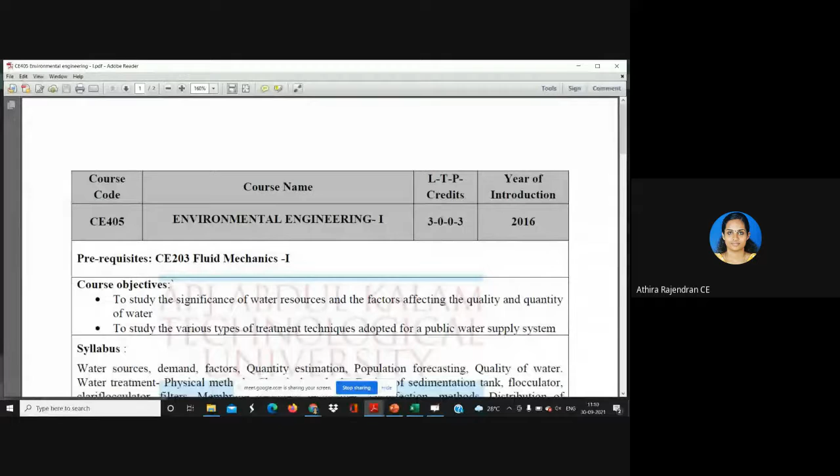Then we will come across demand. So how the community can demand water, that is, if you are setting up a water supply plant, this community needs this much water. So how will we supply water to them? So we need a calculation.

So we need a calculation for how much water is required for drinking, bathing, washing, everything, as well as for gardening purposes. So for everything we need to have a calculation. Based upon that, we will be supplying water to a community.

Okay. Then if we are setting up a water supply plant at the current date, we'll be planning it for a future date, like it will have a life of around 20 to 30 years. So what is going to happen in those 20 to 30 years? The population is going to increase. So we have to estimate the population at a period of after 30 years, and then we have to design these things for that population.

Okay, then we have arrived at the water quantity, how much water we have to calculate. So after that we have to think of the water treatment system. So what all treatment do we need to give? Physical methods, chemical methods, other methods are there. So some methods we have to design. Some design elements are also coming in this one, so for the treatment, some design units are there.

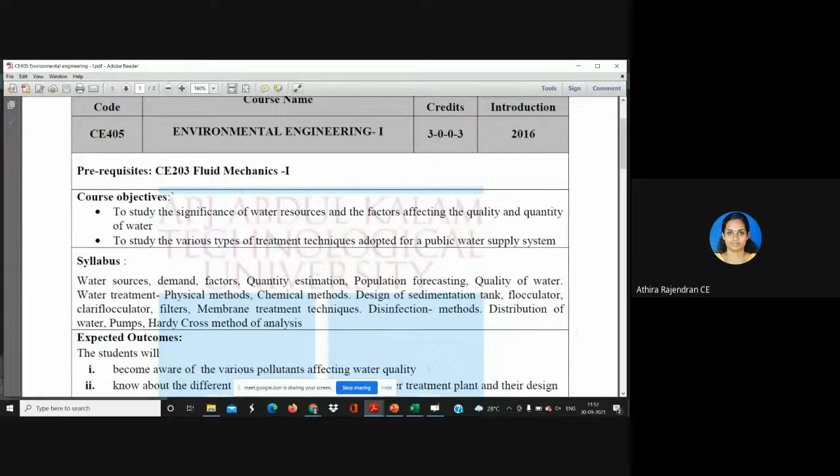And the textbooks you can refer to are Water Supply Engineering by Punmia, and Water Supply Engineering by Garg. Very simple explanations. So I'll refer to these two textbooks. You can refer to them. Other reference textbooks are also there. All these textbooks are available in the library.

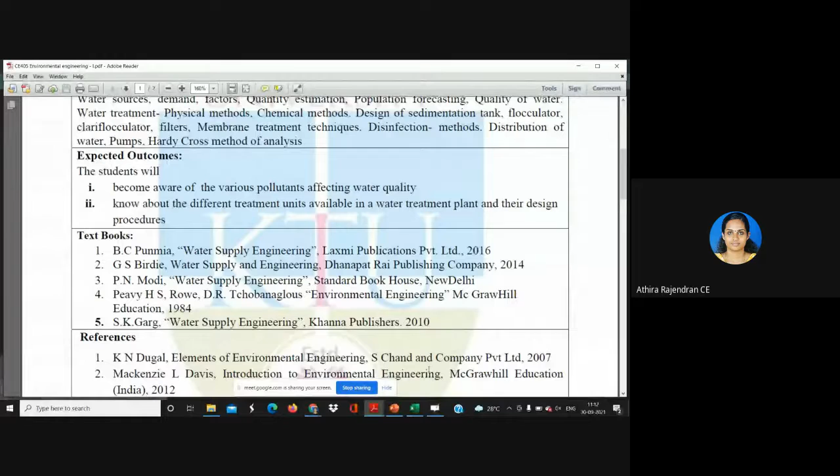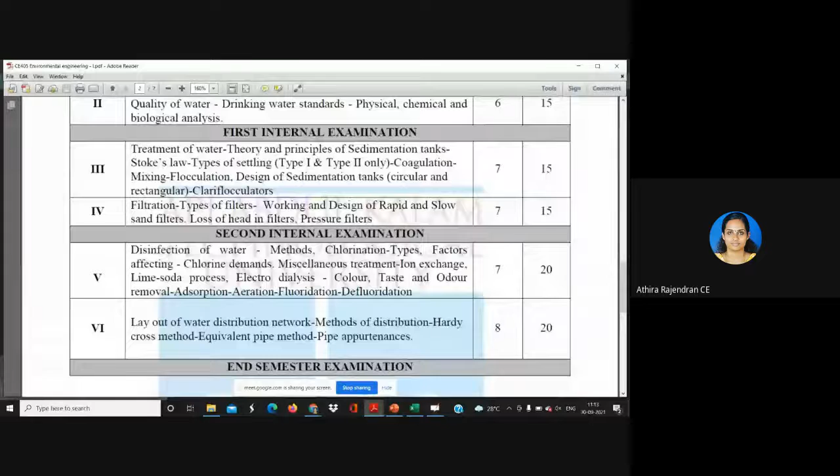So next is about the modules. Okay, so we know that it is divided into 6 modules. So as I have discussed the important things, the first one is module 1. Module 1 is about the introduction. So what are the sources of water supply? We'll go into a little detail about the surface sources and subsurface sources. Then water demand. So how you are arriving at the water demand of a community, like bathing, washing, cooking.

Then, in case a fire accident occurs, we have to meet that fire demand. So for that, what amount of water do we have to keep aside? All this will come under water demand. And this water demand will vary with time. Like, the morning water demand will not be equal to the water demand in the afternoon. So there is daily variation and seasonal variation in the water demand. We have to go through all that.

Then there is population forecasting. Population forecasting will also depend upon the type of community for which we are giving the treatment plan. If it is a fast-growing community, we have to use an appropriate method for their population estimation. So like that, we have different population forecasting methods.

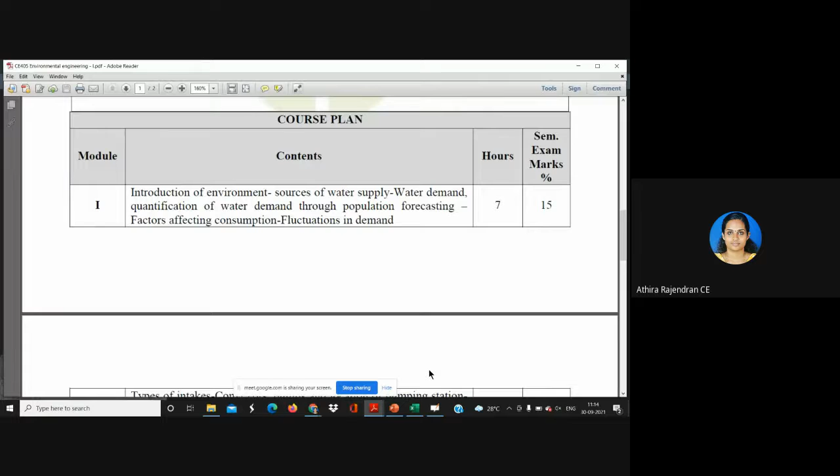You have to expect numericals from population forecasting methods, and also small numericals from the water demand part. That was seen in the previous year question papers. So we will be solving the kind of problems seen in the previous year question papers. You need to expect that type of problem, and in population forecasting there are small derivations. It's quite simple, you can go through it very easily and understand it. Then the factors affecting the demand. So that is about the first module.

In the second module, you will have to go through the types of intakes. Intakes are structures which help take the water to the treatment system. We will see that in detail. Then conveyance, then pumps and locations of pumping stations. While designing a water supply system, we need to keep pumps, because we need to take water from a well to a treatment location which is at a higher elevation. So we need to know that.

Next is the drinking water standards. In order to supply water to a community, we need to maintain certain drinking water standards, which are established by the Indian Standard Code. So we will have drinking water standards, like pH should have a certain value. Then we will be studying different parameters like BOD, COD, hardness, turbidity and all. All these parameters should meet a certain specified value.

Next is the third module. After the water has been taken from the source, we need to treat it before supplying it to the community. The third module is about the simpler primary treatment methods, mainly sedimentation tanks. This will all be new to you, but the topics are very simple. Here we also have a little bit of design: design of sedimentation tanks and clariflocculators. Since it's a design, you can assume certain values within the limits, or they will give values, and you can do your own design. Small problems come in the university exams.

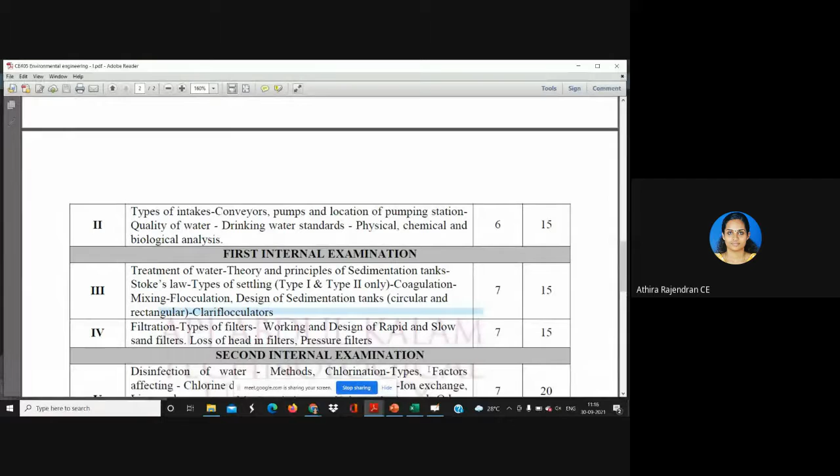Next is the fourth module, about filtration. In filtration, there are two main types of filters, and it also has design: working and design of both rapid and slow sand filters. Filtration is another type of treatment.

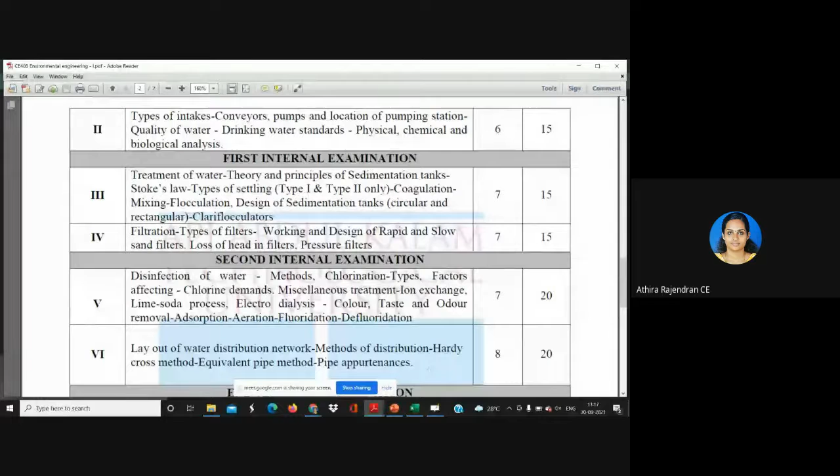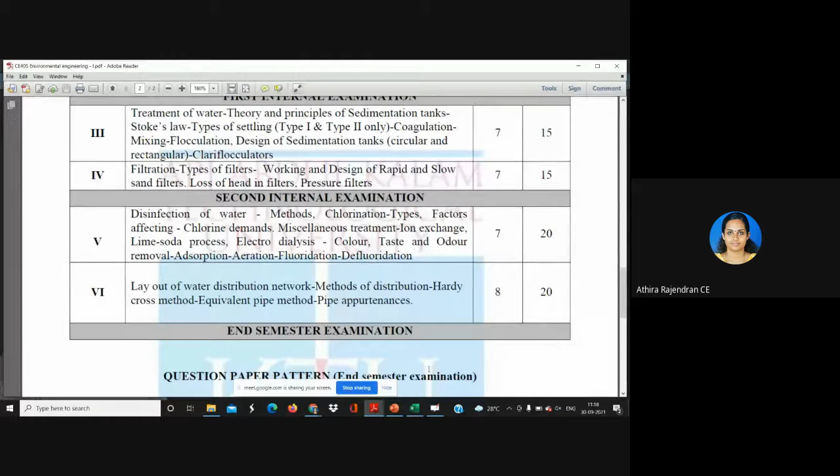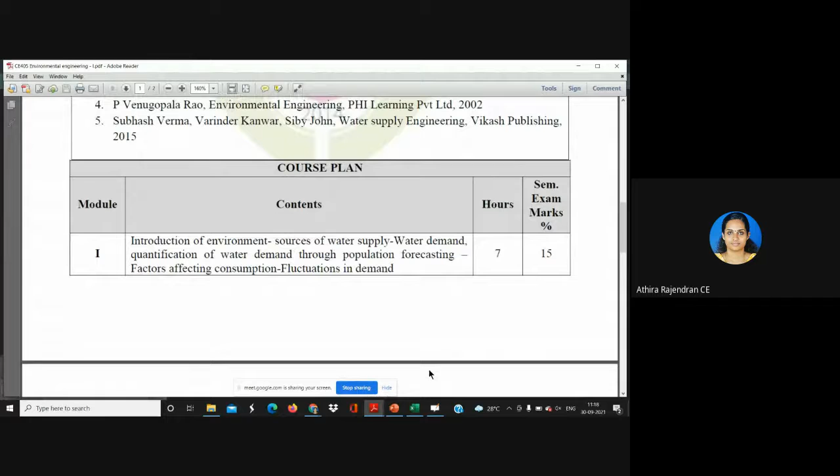After the treatment, we will supply the water to the community, so we need a pipe network. How is the pipe network designed? What are the different types of pipe networks available? We'll be looking at all these things in the modules. Overall, I think this is a simple subject. It is not as difficult as design subjects. You can easily go through it. And for the numericals, I'll be solving all numericals in the classroom.